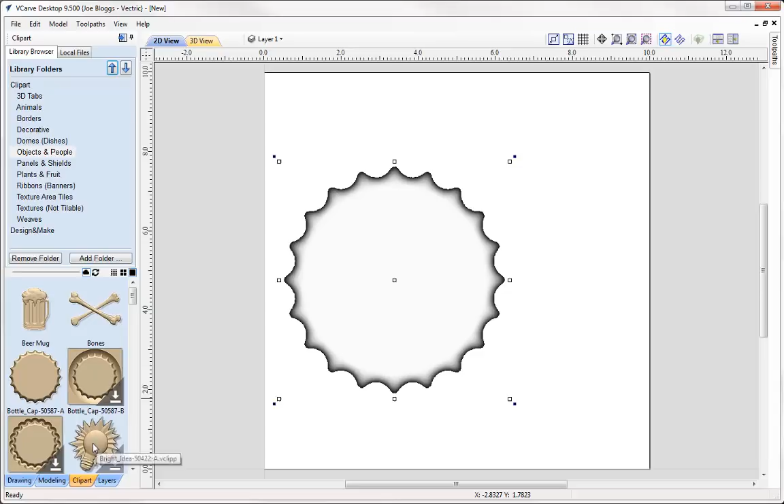So with that, the item has now been downloaded and I can simply move that into the part space. Or alternatively now, if I've already connected, I can just simply paste that across and it will download and get pasted into the job at the same time.

If I close the software now and restart it, my connection is still there. So if I go now to start another part and introduce more clip art, for instance, I'm now going to add in these flowers. It won't prompt me, it will also automatically download and import because I'm already connected to my V&Co account.

The biggest changes to version 9.5 certainly fall within Rotary, in terms of the way we manage the job setup, the display of the different models and toolpaths, and the toolpaths themselves. In version 9, Rotary was only available as a gadget-only function through the top menus. As a consequence, it was very difficult to make job modifications, and we couldn't combine different layouts such as spiral with cylindrical within one job.

In version 9.5, we no longer need gadgets in order to create the job setup. We have a new job type called Rotary with a dedicated workflow, and as a result we've made it very easy to edit parameters such as changing the job size or the orientation, and we can combine spiral and cylindrical layouts within the same job, and we'll see demonstrations of that later.

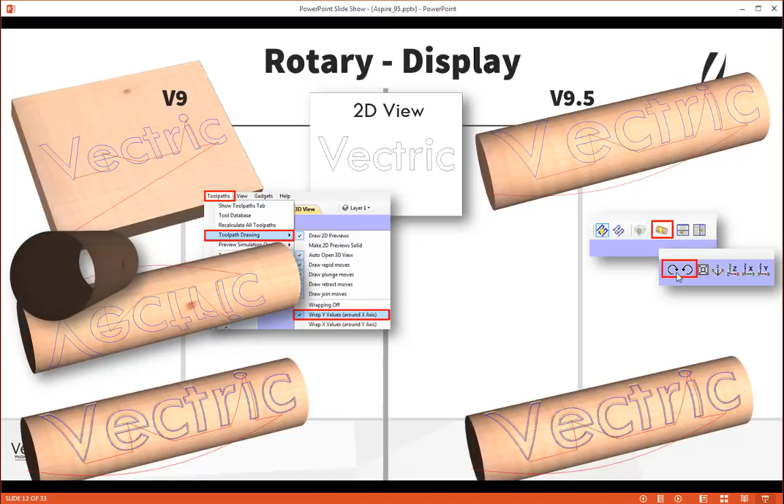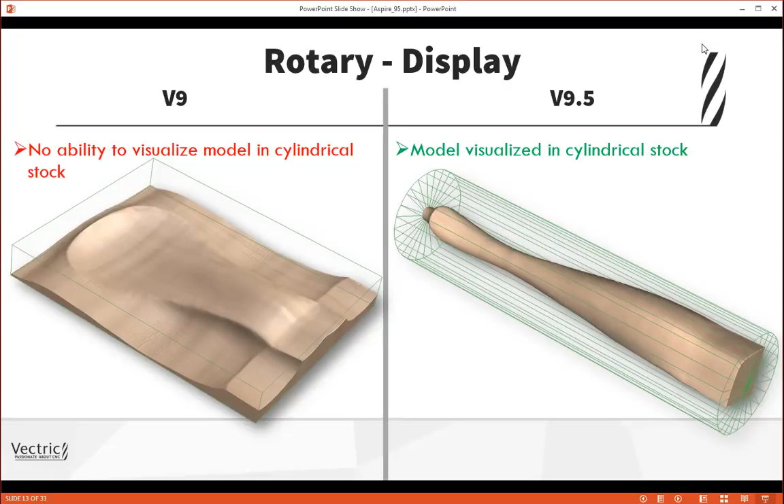Okay, so I started a session in 9.5 and we'll perform the same demonstration. Rather than gadgets, I can go straight to create new file. I've selected rotary as my job type, length 20, diameter 3, and I'm orientating the rotation axis along the Y, therefore I'll be wrapping the X values. Okay, and I'm now going to OK that.

So I've suddenly realized, just like I did with the previous one, I need to change this to a 5 inch diameter. Well, that's very easy here. I simply change to 5 and OK. But finally I forgot that actually on my machine I need to reorientate this completely, because I want to have my rotation axis parallel to the X and wrapping the Y. Well, that's easy too. I can simply select that option and that will rotate the part round.

So with that, I'm now ready to create the text. I can place the text on the screen now and just type in Vectric, and I will locate that in the center. Go across to machining now, select the profile toolpath and calculate, and immediately you can see on the screen that the toolpath is facing me from the middle of the part.

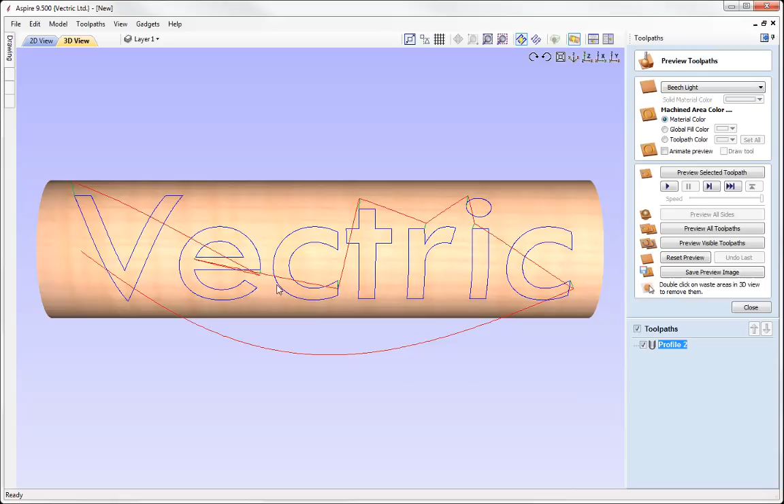If I rotate it, it's solid now rather than being open-ended, and of course I can now move forward and simulate the toolpath. So we can see there are some significant improvements to the speed with which we can create the actual job type, the way in which we can modify that if we do need to go back, and of course the way that the model is displayed.

Okay, so there's been considerable improvements in a number of key areas with rotary.

In the next demonstration we're going to do something that was previously not possible with version 9. When setting up a rotary job using the gadget tool, you had the option to either have a simple cylindrical wrap or a spiral wrap with a number of revolutions. However, in version 9.5 every job is considered essentially a cylindrical wrap, with the option to have dedicated levels that are set to wrapping to allow the clip art to be wrapped round the cylinder. So in this example we're going to combine the two by having essentially a spiral wrap portion in the lower region of the lamp stand with a standard cylindrical wrap with the fluting toolpath in the upper region.

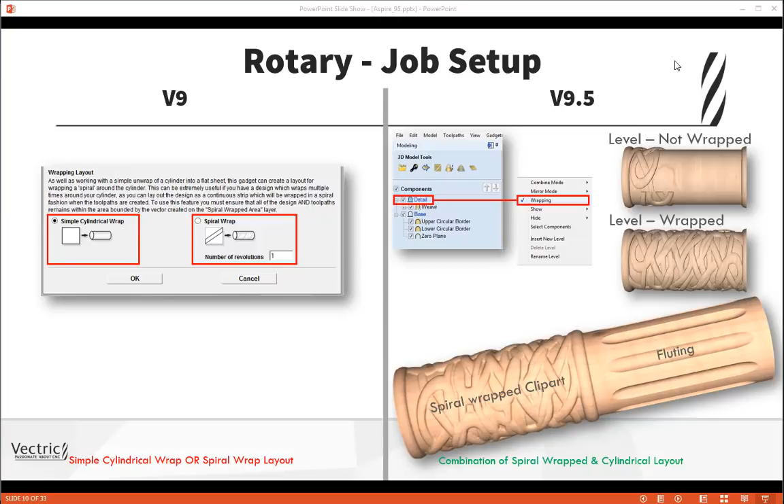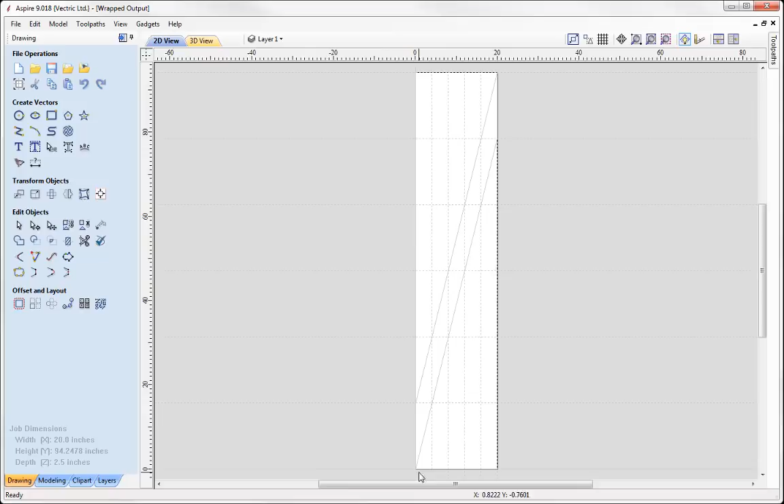Before we take a look at Aspire 9.5, I wanted to show the spiral layout using the gadget in version 9. So from the gadget menu, gadget, wrapping, wrap job setup again, and in the lower right hand corner here I'm going to set it to a spiral wrap with 5 revolutions. What that does is create an oversized part, so it's extended in Y here with the vector to help locate the clip art in order to be able to wrap it round 5 times. But as you can see, it's created an oversized model which will restrict us from combining this with a standard cylindrical wrap in one half of the model.

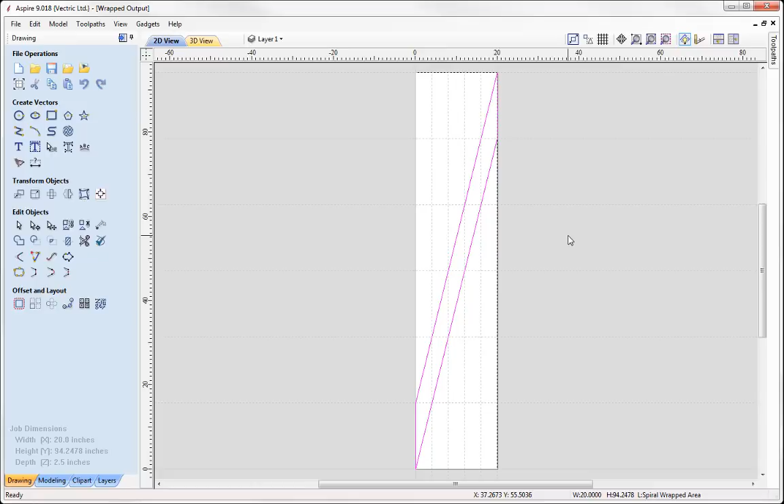So I'm going to close this down now and we're going to open Aspire 9.5.

Okay, so we started a session of 9.5. I'm going to go straight across and create a new file here, 20 in length, 5 diameter. And I'm going to bring in some clip art, which is going to be the clip art for the weave.

So I'm going to drag that into the space, and immediately it's asked me would I like to modify the model to move the 0 plane up to maximize the stock that we've got. I'm going to say yes now.

I can go straight to the 3D view. You can see the model with the relief, and if I did want to see the stock in situ as well, you can see that together, and it's modified the 0 plane to accommodate the extra clip art that we've added to make full use of the stock.

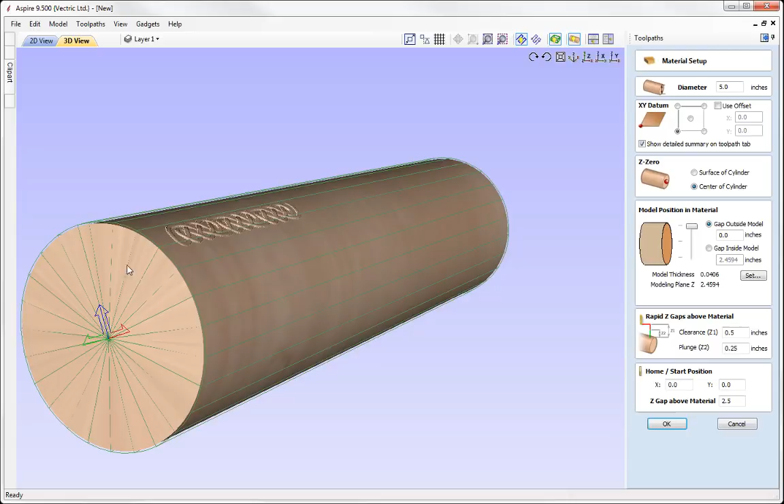Adding that 0 plane would be something that would need to be done manually, and obviously its base height would need to be modified manually as well. So this is automatically done in 9.5.

So I'm just going to come back now to the 2D view and swap across to our 2D menus, and before I start to manipulate that clip art, I need to really create a dividing line down the middle which will differentiate between the spiral wrap and the standard cylindrical layout.

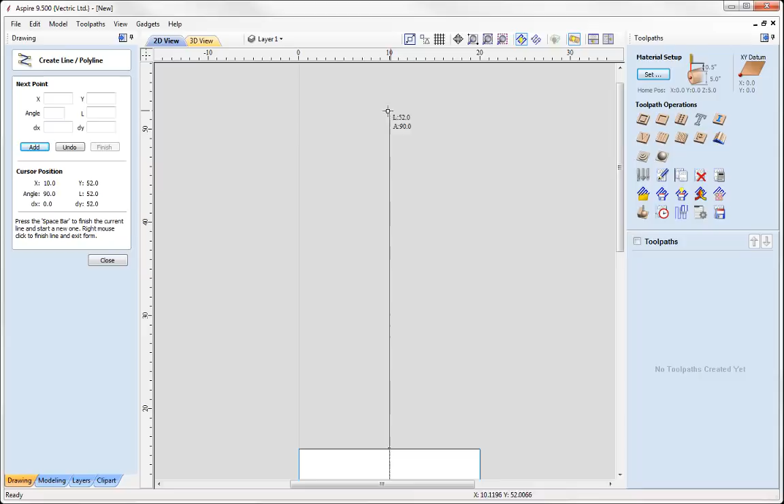So I'm going to go into my drawing menu and add in a vector from the center, going straight up at 90 degrees. I'm now going to take my clip art here and manipulate it. I'm going to change the size, increase that a bit to make it more chunky, and rotate it round by 90 degrees using 9 on the keyboard.

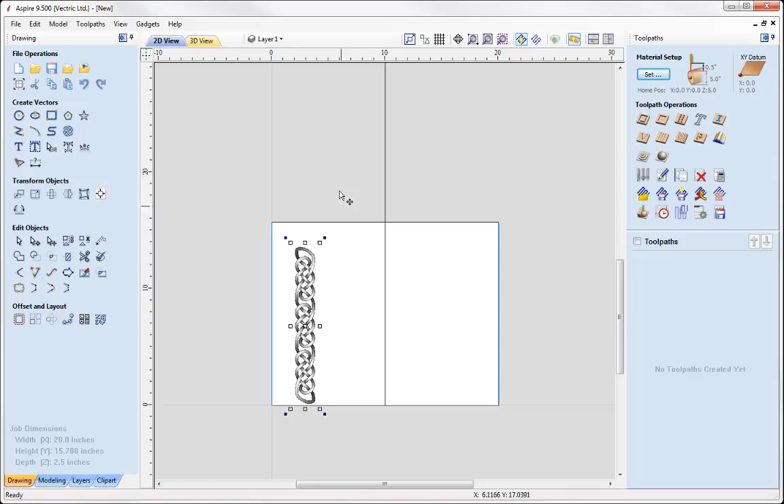Just slightly reposition that now, and I'm going to make a copy of it. I'm going to hold the control key down and move it up. I'm not so worried about the alignment because I can address that after the fact. I'm just going to move this up now, and I'm happy with that. I've got enough length there to wrap all the way around.

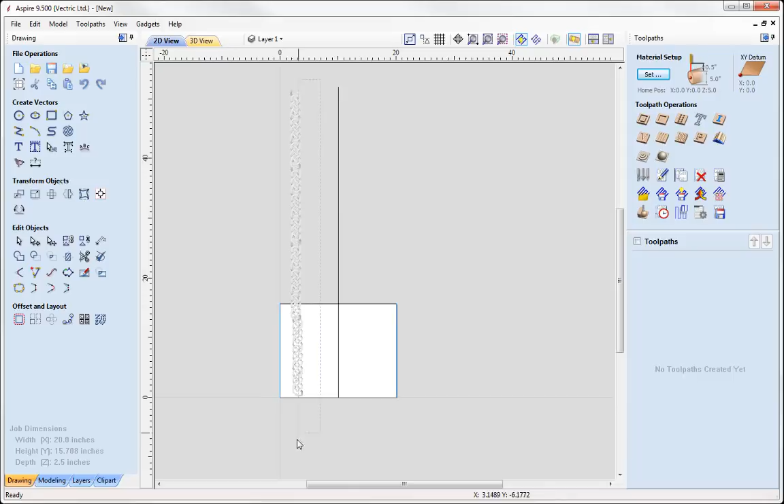I'm going to select those items and align them to the left edge, then come in and group those items together as one single object. That allows me to move that around as a single entity, and of course rotate that as a single entity. So currently if I go to my 3D view here, you can see it's just wrapping around once.

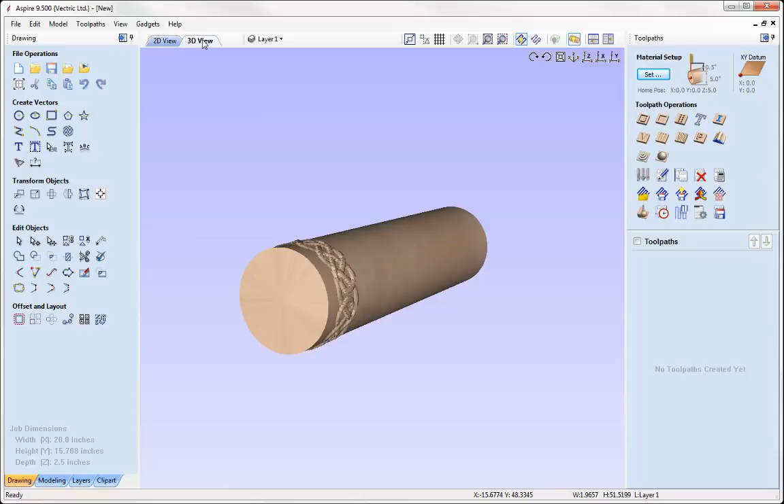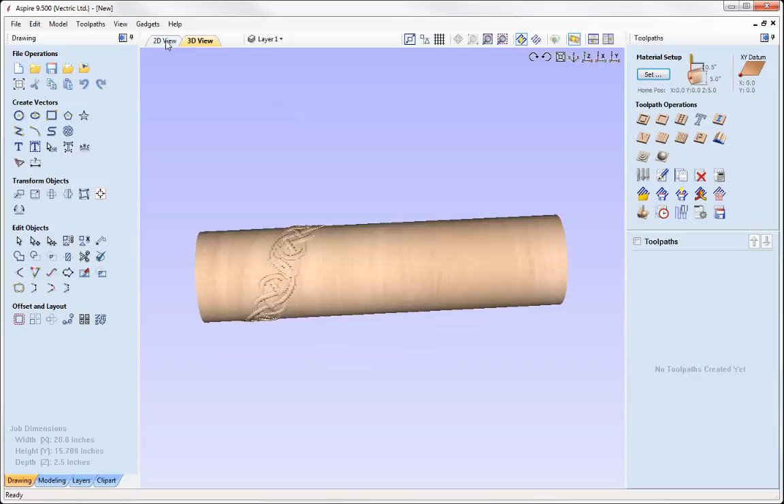If I rotate this, bringing that across, you can see once again it's not fully wrapping all the way down, it's only doing one wrap, or what can actually be seen physically over the job space.

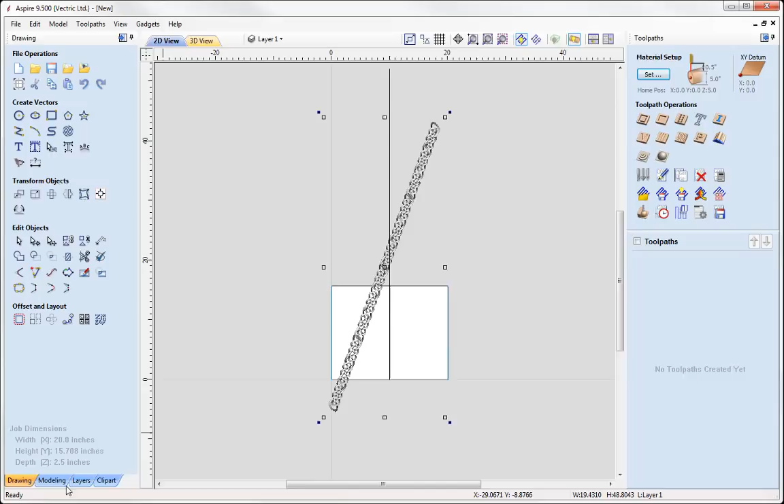So what I need to do now is manipulate this to only essentially overlap the edge, just overlap the dividing line, and then change the level to be a wrapped level. Before I do that, I'm going to do some housework here and create a new level and move the weave to that level.

Come back now to my clip art and rotate that round and move this into position. So we're going to move that roughly like so. Okay, now I'm happy with that at the moment.

If we then have a look at the 3D view, once again the angle's correct, but it's not really wrapped. So I can come back to my level now and simply select right mouse key, wrapping. So that's immediately wrapped that round.

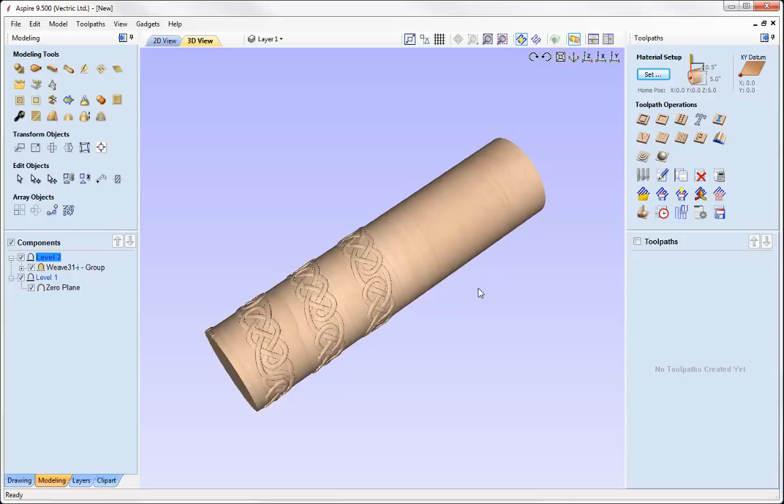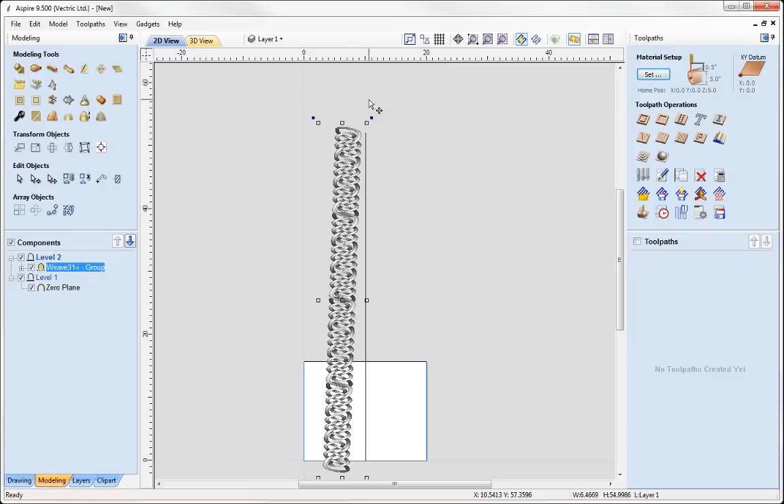What I'd like to do really is make this a little bit more of a random intertwined tile all the way round. So I'm going to come back to here and rotate this back round, back vertically, and change its size a little, increase it, then rotate that back round, maybe increase the size a little more, rotate that round, and move that back like so.

And just increase that now, and we should, when we come back to the 3D view, see that we've got this quite unusual wrap of the relief over the cylinder. Essentially it looks like we've tiled something round the cylinder, but in essence this is just a spiral of the clip art that happens to overlap, and because we've got that set to merge, we get this nice random looking wrap all the way around the cylinder.

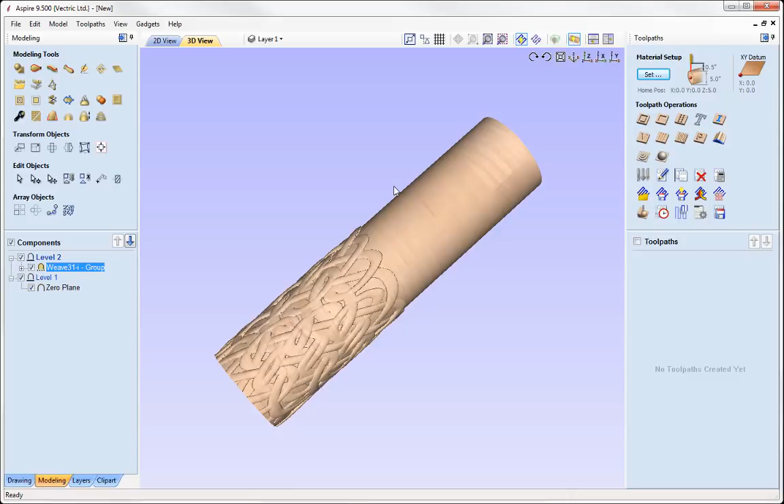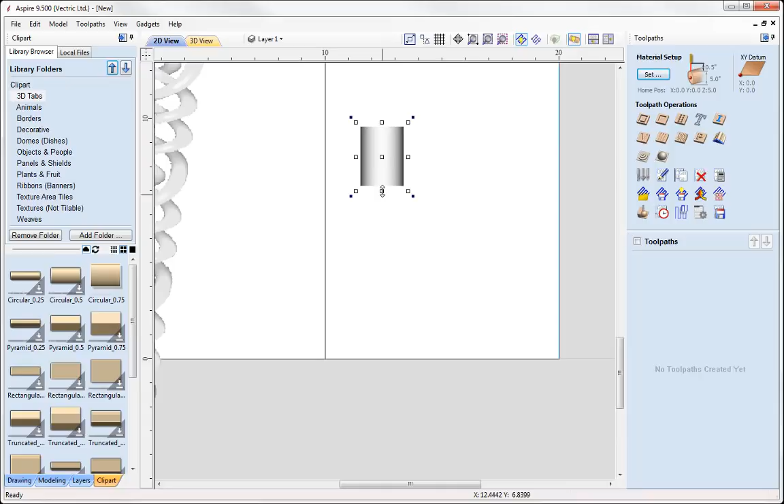Now I need to put in a divider between the top half and the bottom half. So I'm going to come back to my clip art, and in my 2D view simply pick up the 3D tabs here, drag one across. We can see that's particularly small, so I'm just going to rotate that and scale that up, extending it in length either side.

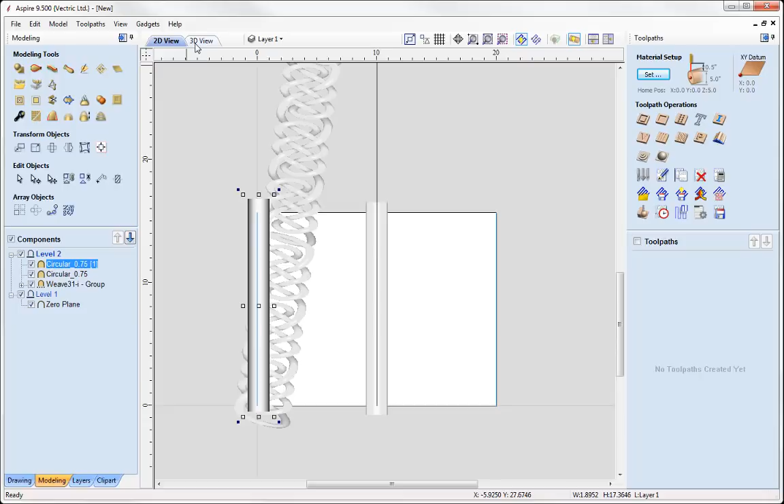I'm going to change the height of that, so we're going to have that be 0.3, and we are going to now center that on the screen, and make a copy of that at the bottom. I'm going to pick that up and hold control and move that to the bottom. Okay, somewhere around about there. If we have a look at the 3D view, we can see that we've added a base and the divider across the middle, so that looks nice.

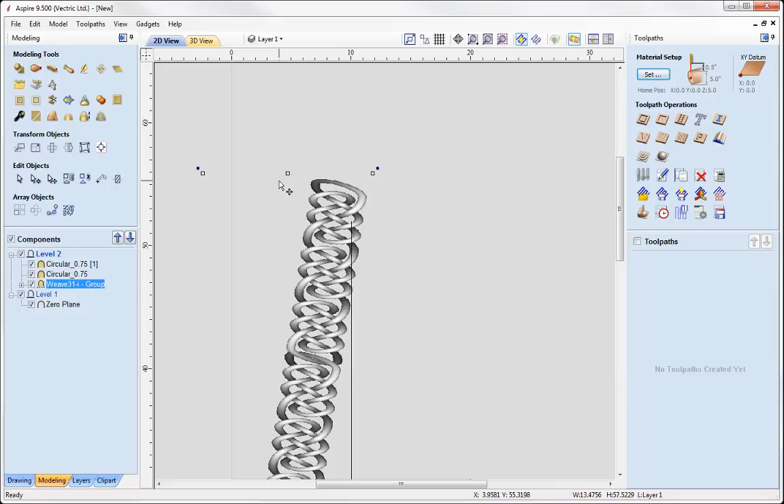We've maybe got a slight overextension here, so I just need to modify my clip art a little, wind this back a tad. I'm just going to bring that back now, and maybe move that slightly that way, and we should, if we have a look at 3D view, have the wrap all the way around.

Okay, so that's quite nice, and like I say, it's a nice organic intertwined weave, which has essentially come from a simple bit of clip art being wrapped round there and overlapping and merging into itself.

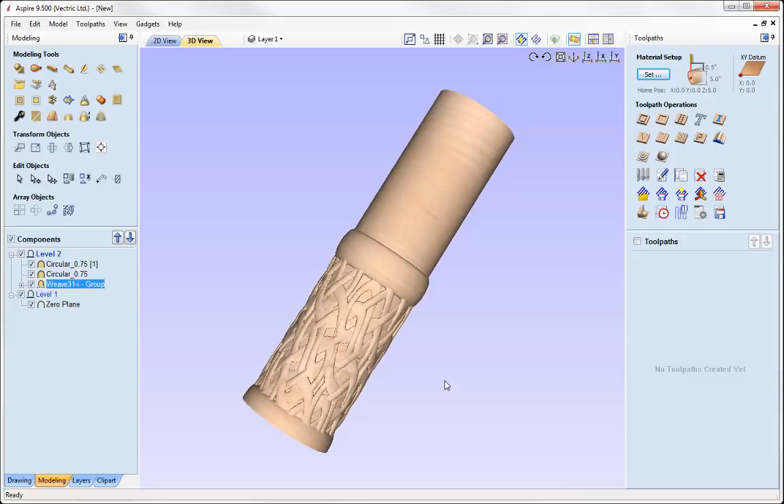So back to the 2D view now, and I want to add in a fluting toolpath to this region here. I can access that from the gadget menu, so I'm going to come up to gadgets and go down to wrapping and fluting layout.

In this case we want 6 flutes, so I'm going to enter 6 there. Now the offset from the start, meaning the distance from the end of the part through to where we want the start of the flute, is going to be roughly around 11.5, and we'll take that up to within 1 inch of the end and OK that.

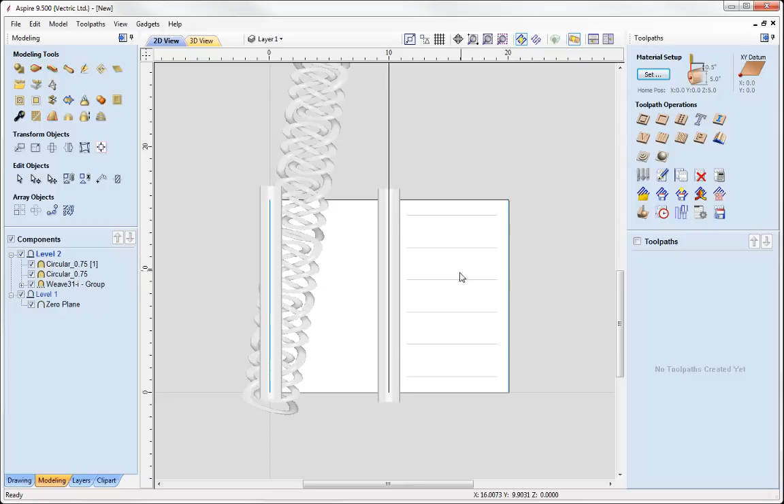So we've got the vectors that have been created here. I now need to decide the start depth for these, and then the cut depth thereafter. I'm now going to come in and pick those vectors, just the fluting ones, go through to the machining, and set up my fluting toolpath.

In this case we know this is a 5-inch diameter, and we are going to go down there, and the maximum depth here is 0.3, so our clip art here is 0.3. So we're going to go down, OK that, and do a start depth of 0.3 and go down by a further 0.2, using a larger tool than our 1/4-inch ball.

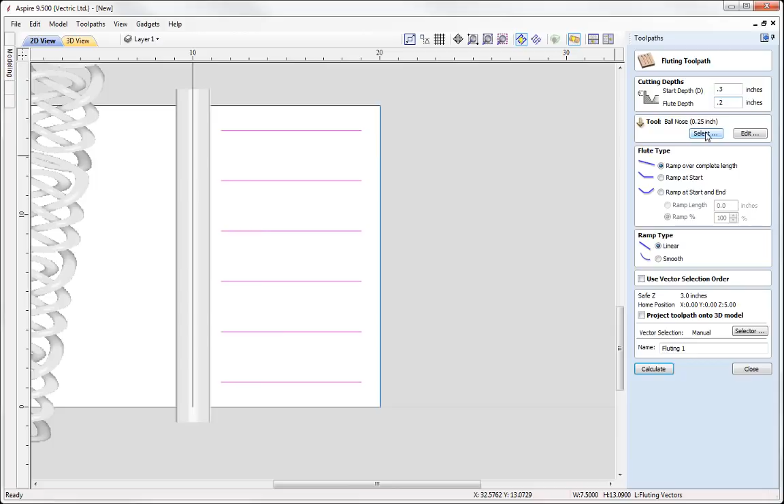I'm going to select that and basically copy that tool and change it to a 1-inch diameter, and change the cut depth maybe just to 0.25 and OK that, and we are going to do a ramp at the start and the end, 25%.

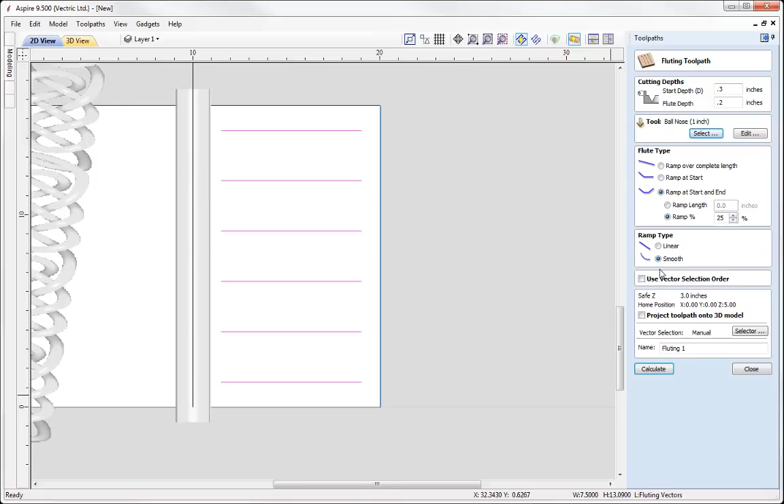So essentially it's going to smoothly ramp in down from the top to create a groove, then go at a constant depth of 50%, and then lead back out or ramp back out. We'll calculate that toolpath - we can see that there. I'm not going to simulate that yet.

What we need to do is create the toolpath for the lower half too. So back to...

Look at the rest here, and we need to really just pick a ball nose here to pick out most of the detail. So I'm going to come back into the 3D finishing, and use a simple 1/4-inch ball. This is not particularly efficient because it will be removing the material on the right hand side here, 90 degrees, and calculate.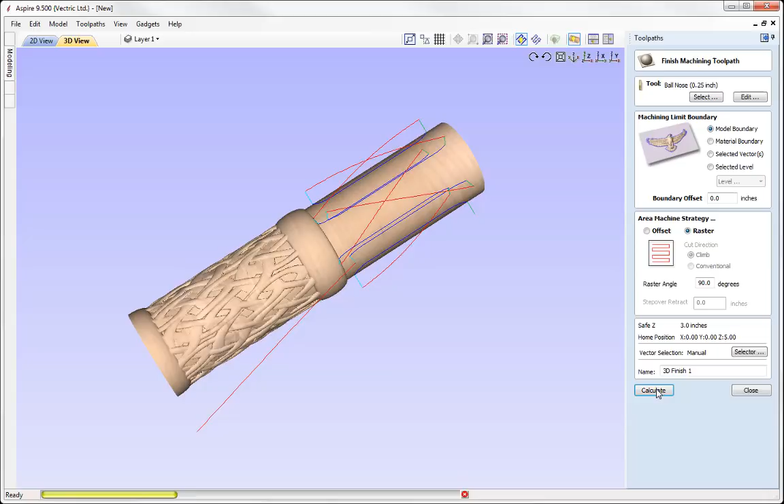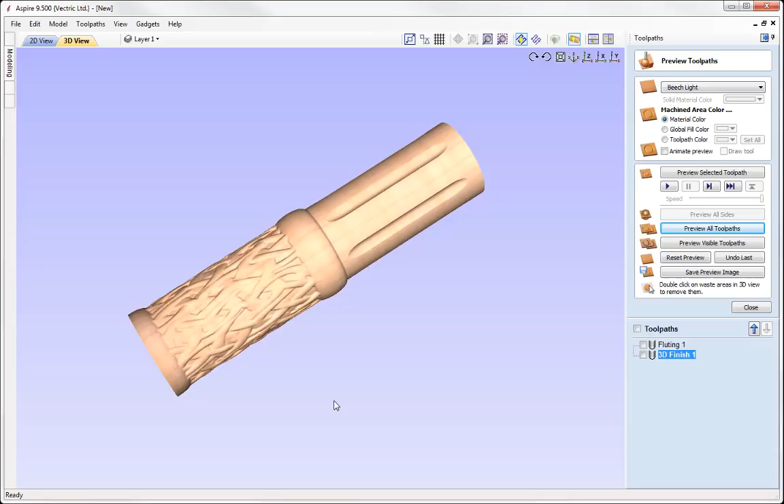Okay, and now I'm going to simulate all those toolpaths, and there we've got our simple lamp stand where we used a combination of a spiral wrap at the lower half and then a standard cylindrical layout with a fluted toolpath at the top part. You can see that it's created quite a neat shape, through the ability to combine levels that have wrapping set with those that don't. And once again, this is something that was previously not possible with version 9.

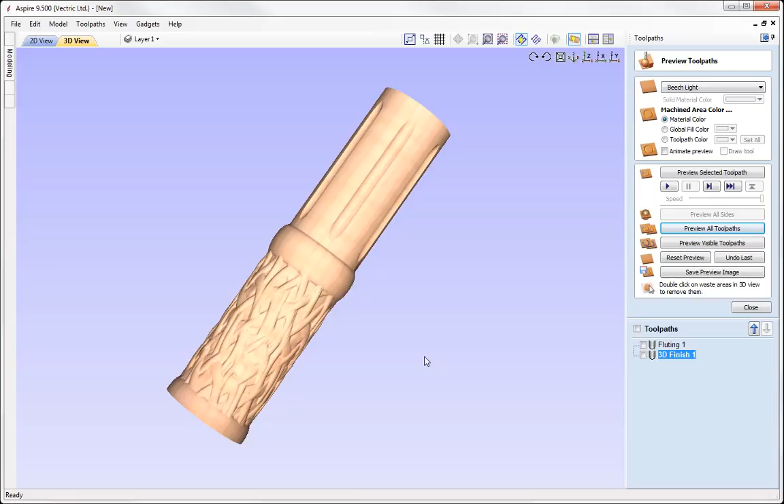For those Aspire users already using Rotary, they're probably fully aware of the vector unwrapping tool that's only available as a gadget in V9. A limitation was that the vector had to be in the center of the job before applying the unwrap. In version 9.5, this is no longer a gadget-based function, but written in as a new icon in the Transform Objects menu. It's far easier and simpler to initiate the unwrap, and we have multiple center of rotation options available.

So we started a session of Aspire 9.5. I'm going to go straight ahead and create my Rotary job, OK that, and we're ready to import our TableLeg.eps. One thing I don't have to do with this version is it automatically creates drive rails for me based on the fact that I may well be wanting to create a 2-rail sweep surface. So that's all done for me, and I can go straight ahead now and come up to the modeling menu and select the drive rails and the cross section and apply that.

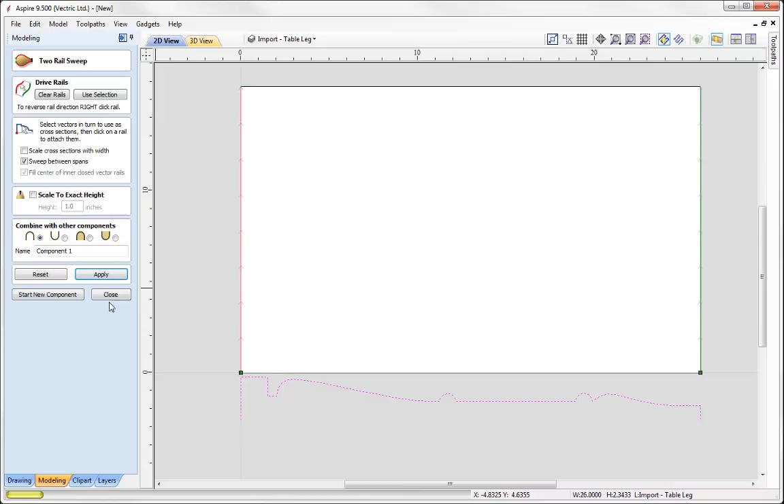And we can look in the 3D view, and immediately that's shown with the correct color, it's shown correctly wrapped, and it's a solid model. So some big improvements there just on visual display.

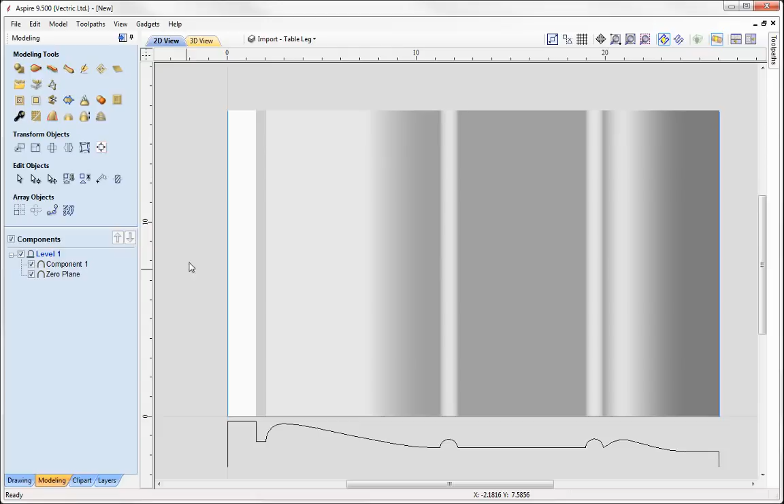So one thing I'm going to do next is to create the vector for unwrapping. Now we already know the dimensions, so I'm simply going to go ahead now and go into the drawing menu and select the polygon and basically just make sure that that is 1.1.

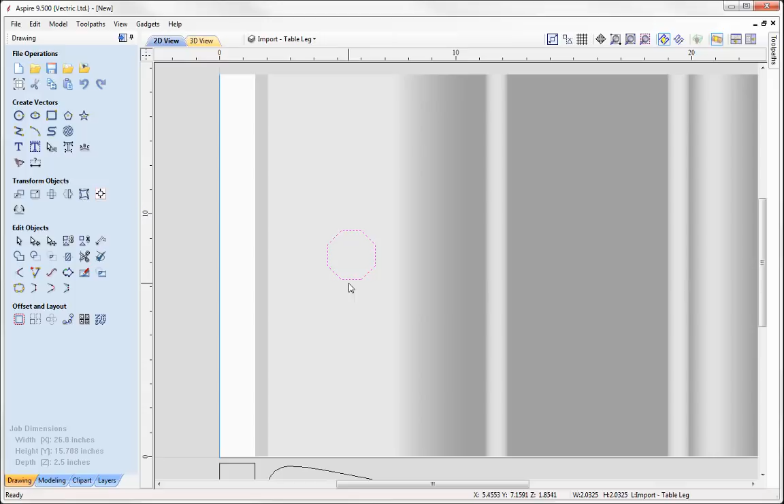And I'll go ahead now and select the vector and unwrap it. I don't need to use the gadget, and I don't need to have the vector located in the center. You can see from the Transform Objects menu we've got this new icon that unwraps.

It checks to see if it falls within the extremities of the 5-inch stock we've got. That's no problem at all there. You've got different options here using the center of the contour, center of the workspace which is the original option, and a custom point if you want to move that off center. So I'm going to go for the use center contour and apply.

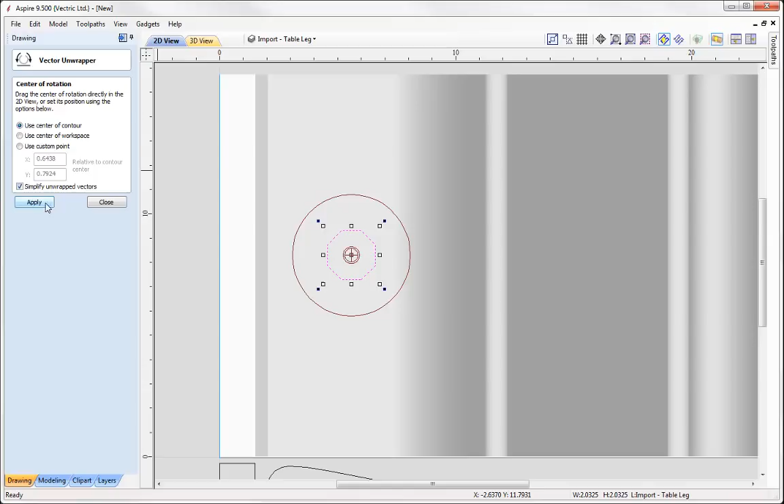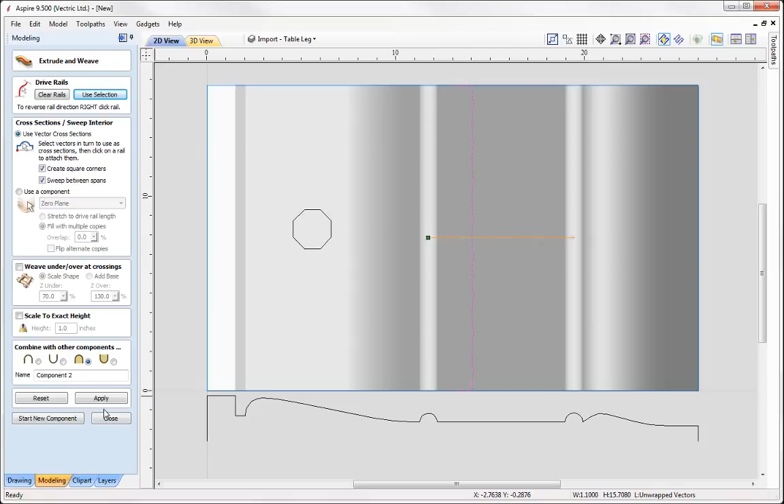Okay, so that's unwrapped it for me. I'm going to go ahead now and create the drive rail for the extrusion surface, and simply select that vector, come into the modeling, extrusion, pick the cross section, merge that in and apply, and we'll have a look at the 3D view.

So as you can see, we very quickly added that in. The tools, the visual tools to be able to see the wrapped component as a solid model, and the fact that with the vector unwrapper I didn't have to center it, and I had multiple options, meant it was far easier for me to work with, and we've arrived at the final design far quicker.

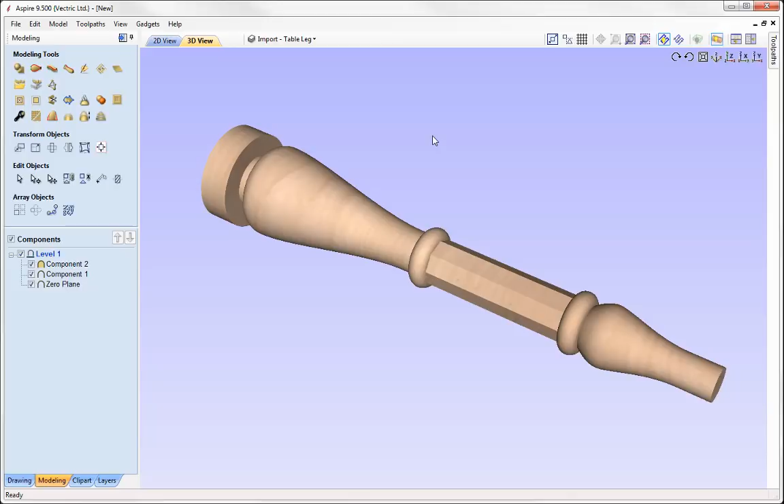For version 9.5 there are significant improvements to the way text is created and edited. If we look back to version 9, you would only ever see the text placed on the screen after completing the entries in the form. There was no dynamic modification, so if you're changing the height or justification, you would need to apply that in order to see the effect on screen. Also, any transformations to the text would be reset when editing the text content.

For instance, if you'd rotated the text, scaled it, mirrored it, etc., and then wanted to make a change, those changes were all lost and the text was presented in its original location.

Whereas for 9.5, when you start by clicking on the screen, it will show a text box showing its start position, its height, and its alignment, and the text begins to be displayed as soon as you enter the first character. So we can see we also have dynamic modification.

If you're changing the font or the height, that will immediately be updated on screen without having to apply. And most importantly, any transformations to the text are maintained when editing the text content, and that applies whether rotating the text, whether you've wrapped it along a curve, modified its kerning, or applied some non-proportional scaling or mirroring. That's all maintained if you go ahead and edit the text at a later point.

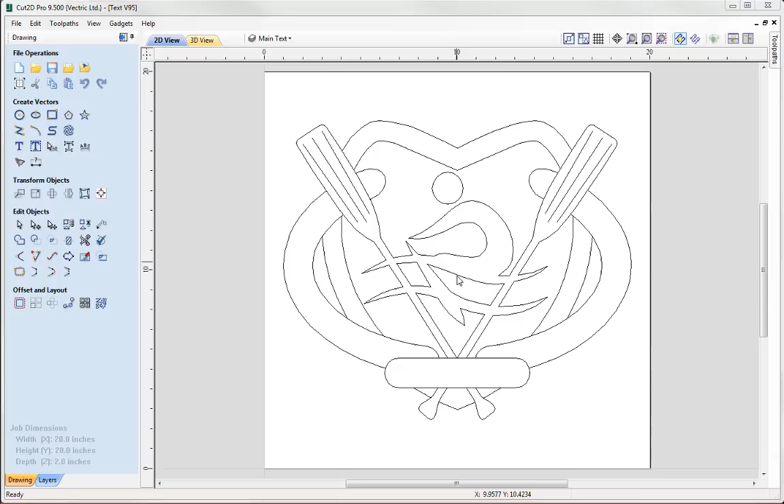Okay, so we've got the same part in version 9.5, and like we did with version 9, we'll take a look at some of the simple fundamental issues we have and see whether these have been remedied. Now I'm going to go to the draw text function.

You can immediately see it's given me a location for where that text is going to start, and wherever I click you can see I've got a text box representing the text alignment, whether that's left, center or right. You can see that's being changed dynamically on the screen.

And you've got the height, so if I change that to say 2, you can see that immediately being updated on the screen, and back down to say 1, and you can see that location being placed. So immediately after that I don't have to come up to the text entry box. I can simply start typing canoe, and we'll see the letters on the screen.

Great. So now, as we did before, mid-flow, which is nice here, I'm going to click on that and scale it down. Okay, I'm happy with that. And then add in 'ing' to create canoeing, and as you can see, that kept the transformation.

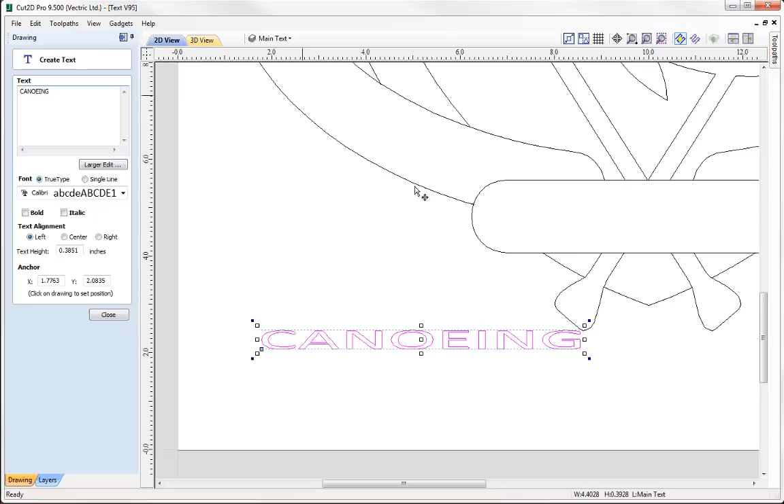Now similarly, if I want to rotate that, what we had to do in version 9 was come out of the text entry, because the transformation box didn't have rotation anchors, but they are here now, so I can just rotate it and come back in and type kayak, and as you can see, it's kept the rotation and the scaling.

And similarly with the kerning, that would also be maintained. So you can see it's a big leap forward with the creation and editing of text, because typically we don't always get things right first time, or quite often we like to use templates for text where we come in and just update the font or update the text entry, particularly if you're making plaques, for instance, where you might have template text that's just edited to be different dates or different names.

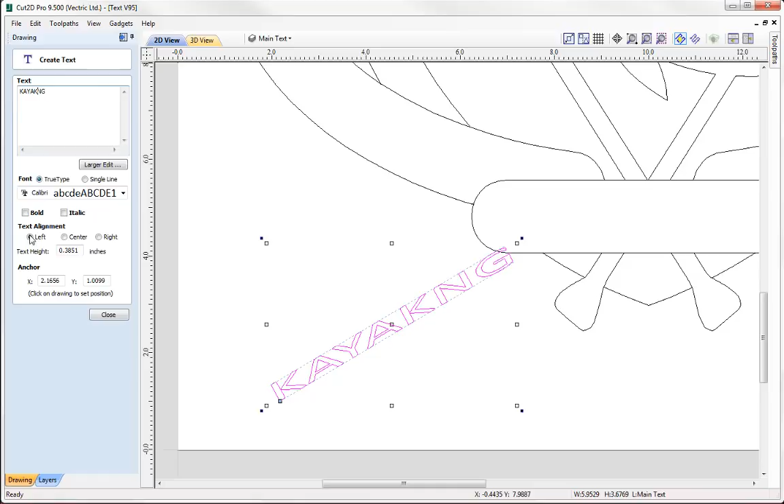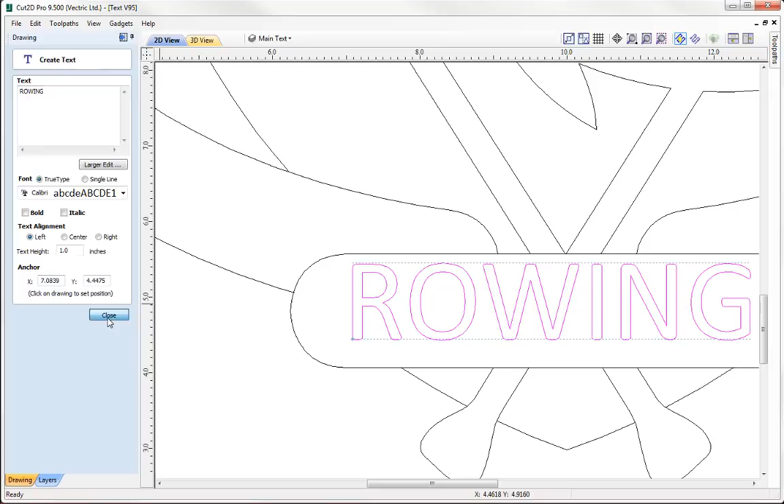So I'm going to delete that text out now and look at the sign itself, creating the first word, which is rowing. I'll place that there. You can immediately see that's the wrong height, so I'm going to change that to 1 and add rowing into this location. I'll shift and pick that outer curve, and align it to the center of that vector. That was simple.

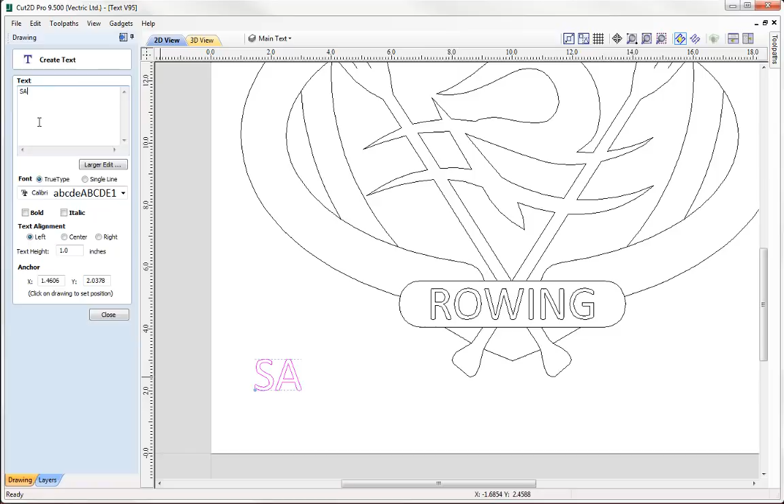Now we're going to add in the word Salisbury into this region here, as we did with version 9. So straight into the text, I'll create it down here and type in SALLSBURY and close out that form.

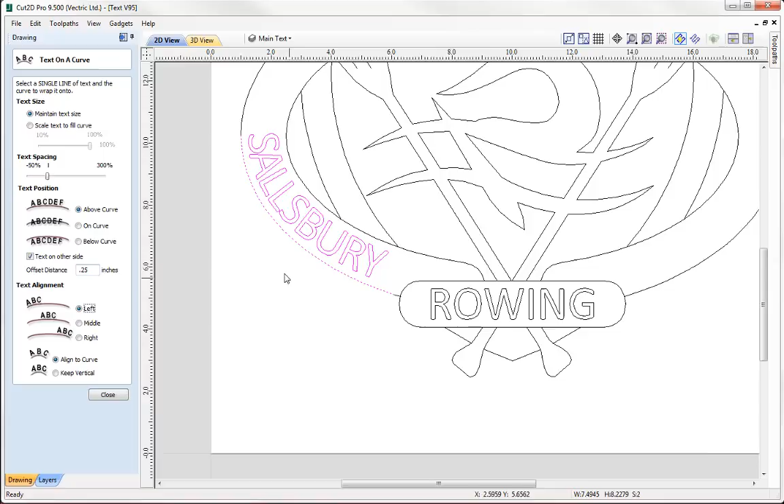I'm going to shift now and pick that outer vector, do the text on a curve, and align to the curve. We're going to be on the other side, and we need to apply an offset of 0.25. Now we can see the letters, but the spacing's not quite right, so I need to increase that up until it's right.

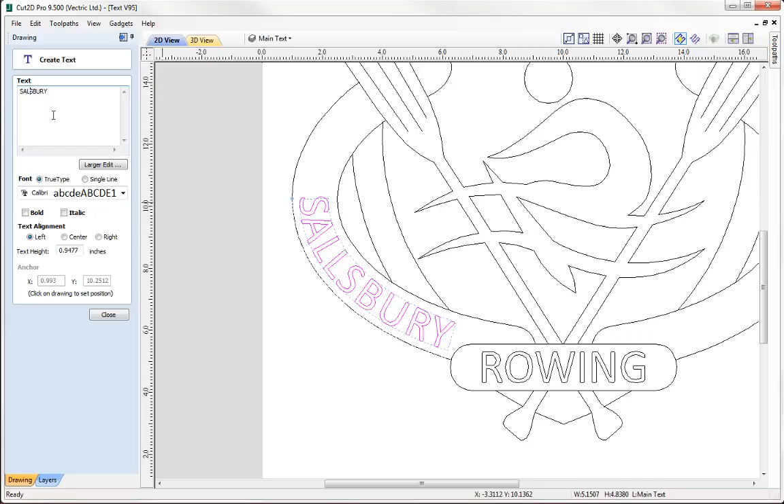Okay, I'm happy with that, close that out. Just like I did with version 9, I suddenly realized I've spelt it incorrectly. So I'm going to come back in to the text form and just change that L to an I, and it's kept the spacing and just replaced the L with an I. That is perfect - that saved me a hell of a lot of time. I'll close out that form.

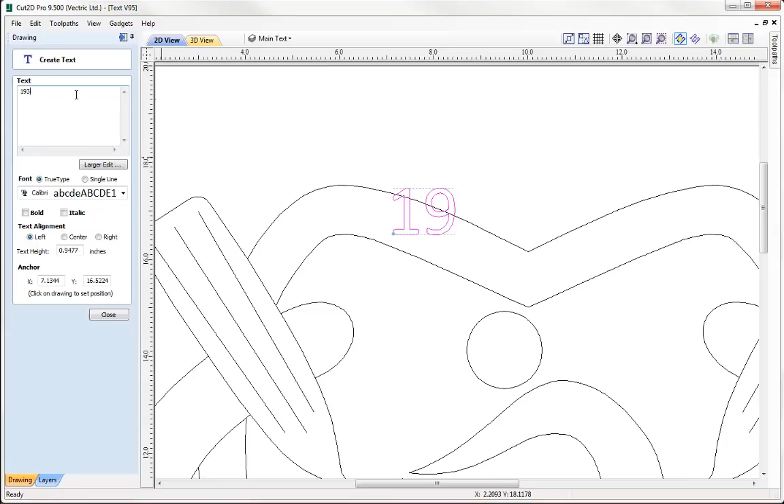We'll switch on the other text the other side for association, and now I'm going to create my two dates here. Simply come in with the text, place it somewhere around about here, and this is going to be 1934. Immediately I can see it's the wrong height, so I'm just going to change that to 0.8.

Mid-flow I can actually click on it, rotate it, and get it into position. Just apply a bit more rotation. I'm happy with that now, so I'm going to copy and paste it - Control C, Control V - and just use the 9 on the keyboard to rotate. I'm going to move that across to here.

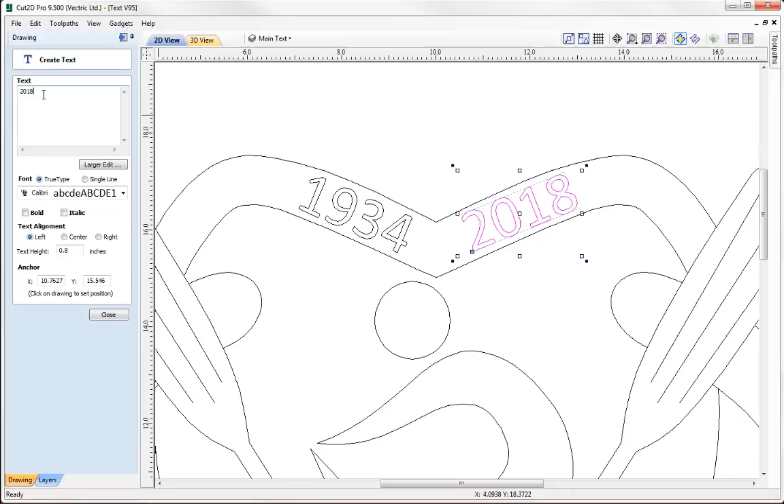Okay, and just come back to the draw text function and change that to 2018. As you can see, we've completed the sign in a much shorter time than we could have done with version 9, given the mistakes that we made along the way.

Further to the improvements with Rotary, we've seen some big changes in how we import models, particularly Rotary based models. With version 9 there was no specific workflow for Rotary, and it was often very difficult to rotate and orientate the model to fit the axis of the block, and most importantly difficult to scale the model to fit within the block, given that you have to calculate the unwrapped widths and fit that to the block. Now with version 9.5 that's been completely rewritten with a new model import, only displaying the relevant parameters depending on whether you're importing a rotary based full 3D model or a flat model.

We have automatic initial orientation of the model, which helps get the part into the correct position before the unwrap. We have a blue bounding cylinder shown around the model, which helps us visualize its orientation. Automatic scaling to fit the block is very important - the calculations are done to ensure the model size is scaled to fit your stock, and we have the ability to move the rotation axis to ensure we get a correct wrap when we action this, and the wrap result is displayed on screen.

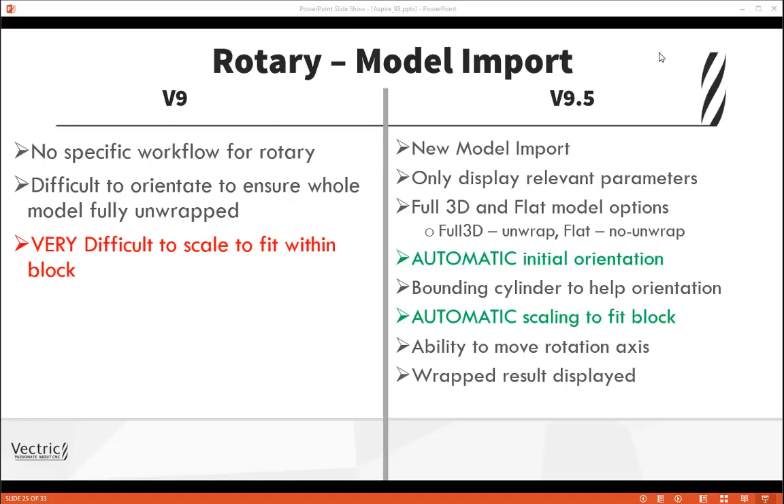So the best way for us to show this is to look at the two different products. I'm going to start by opening version 9.5. Okay, so I started a new session of Aspire 9.5. I'm going to go ahead and create a new Rotary job and import the STL file - straight ahead now, and import the table-leg.stl.

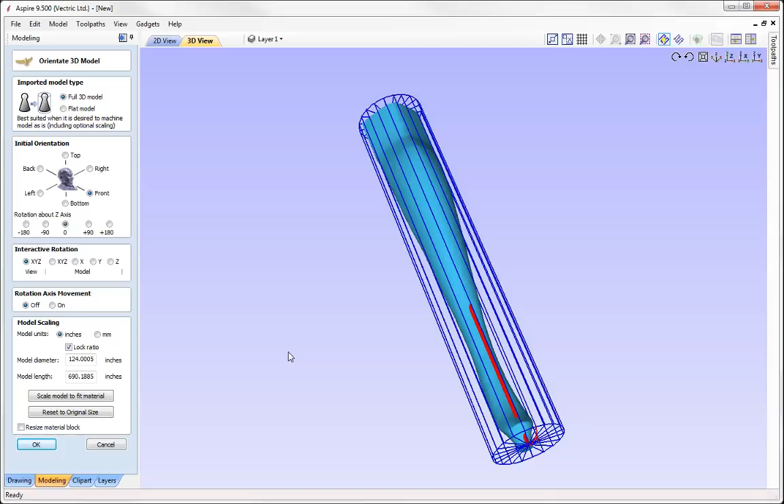We're immediately presented with a different format, differentiating between the full 3D model and flat model options, with dedicated parameters and workflow for each. It's automatically attempted to align my model to the block, giving me a bounding box around the model and the rotation axis. We can clearly see the rotation axis is not running through the model, which I would need to change to ensure a true wrap. So I'm just going to orientate the model now so I can move that down.

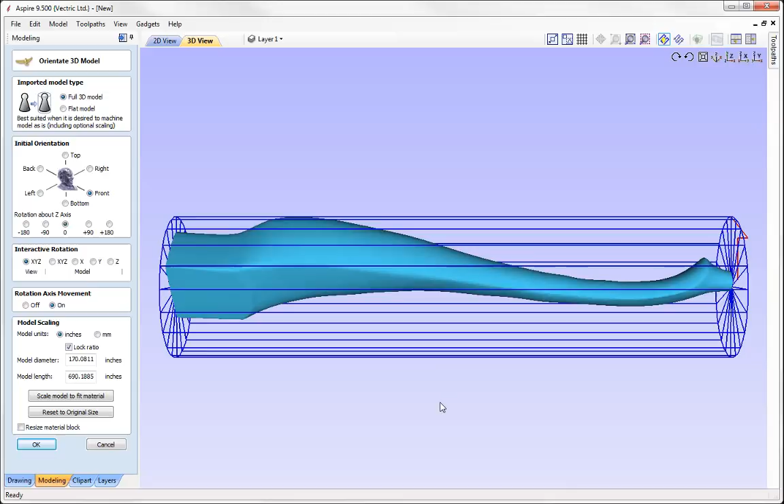Now you can see that I'm just going to move that down gently now so it's inside the actual model, and it will immediately resize the bounding box.

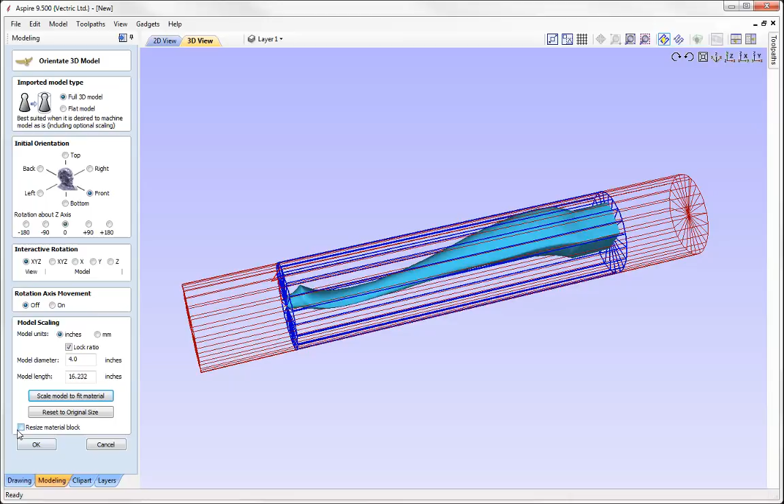One thing I must do is actually scale the model to fit the stock, so I'm just going to scale that now, and you'll immediately see presented on the screen the stock and my model within the bounding box. I want to remove some of this end stock, so I'm going to resize the material block as well and hit OK, and that will unwrap the model but show the presented wrapped model on the screen.

So I can manipulate that, have a look, I can see that in its unwrapped format as well, and I'm happy with the result and ready to move forward.

You can see given the stock size, the table leg is at 2 inches, so it's filling the maximum height, filling the complete 4-inch diameter cylinder that we have.

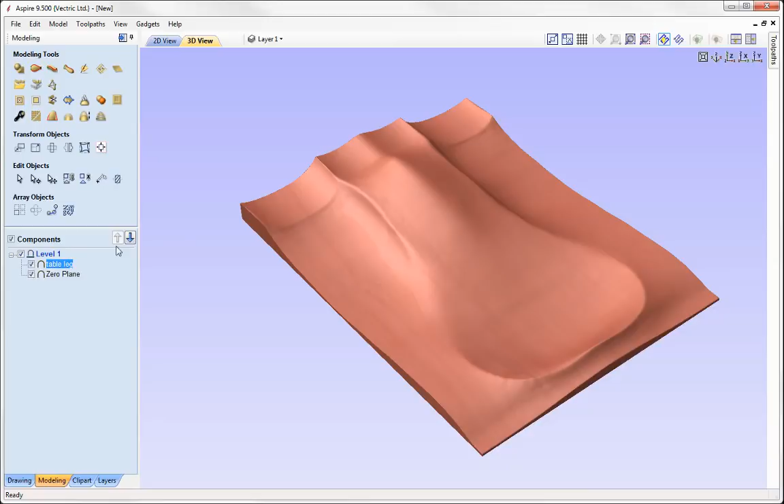So the next stage is to add some clip art or relief on the top. I'm going to add in a new level first, go to clip art and add in some clip art. But remembering this is Aspire, we can add in extra STL files like we did with version 9. So I'm going to position and orientate the model and go and grab my grapes.

In this case it's a flat model, very easy, don't have to do anything here, just go OK. So immediately that's presented on the screen. Very simple to bring in a model, because we differentiate between a flat model and a wrapped 3D model.

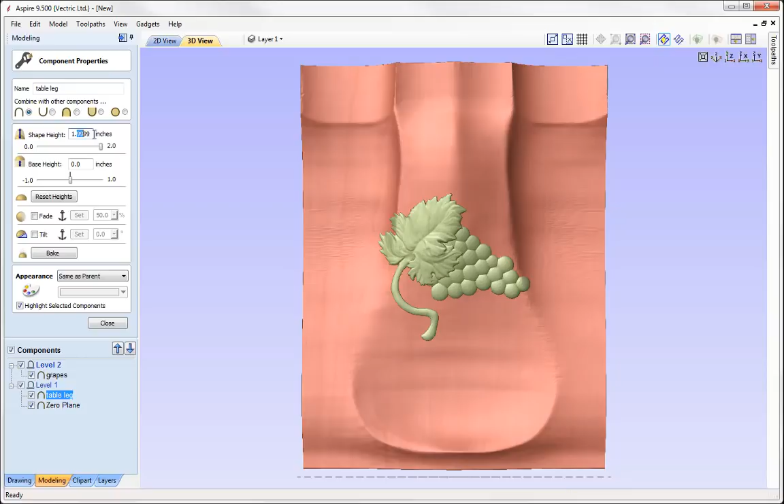Now I do need to quickly change the height of those grapes to say 0.2, and I'm now going to also manipulate the height. I'm just going to change slightly the height of my table leg, because I know that may burst through, so I'm going to change that down to 1.9. Then we're going to come back and manipulate the grapes.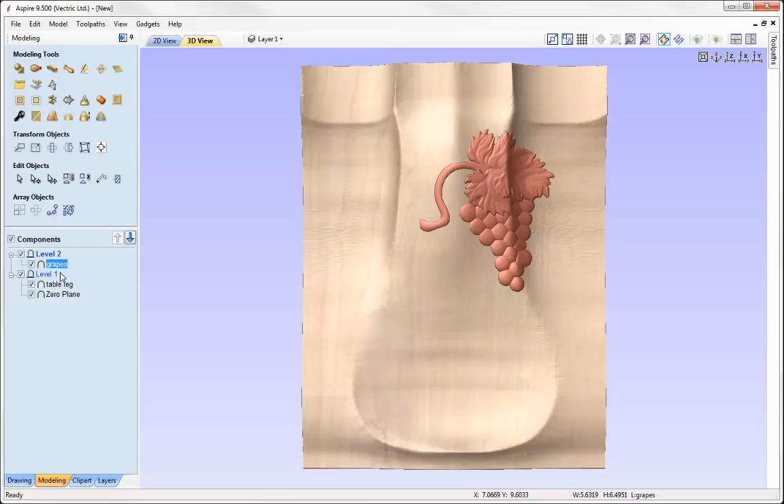I'm going to pick that up now and rotate it round, and I'm happy with that level of rotation. Move it across, and we'll put it somewhere around there, and I'm going to close out that form, and rather than mirror it manually, I'm going to use the mirror mode with that level, mirror right to left.

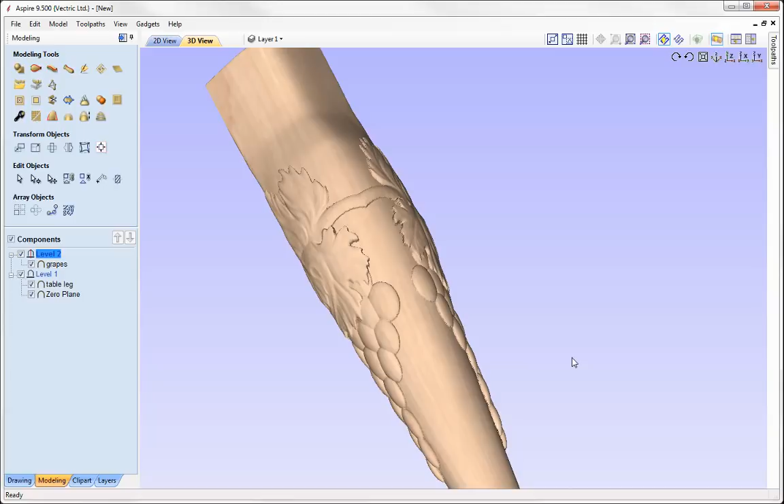That gives us a nice result, and I can immediately come back up and see the wrapped result. As you can see, it's much easier to work in the wrapped view now that we've had significant speed ups there. So we can see that, yeah, I'm happy with that, and I'm willing to move forward to machining.

I'm going to go straight across now, set up my block, everything's fine there. There's still a bit of material clearance at the top, and go straight to the 3D finishing, 0.25 inch ball and rastering at 90 degrees.

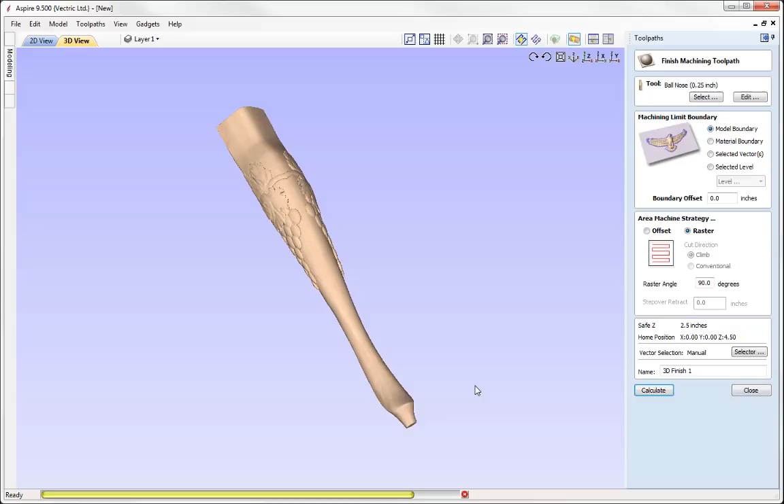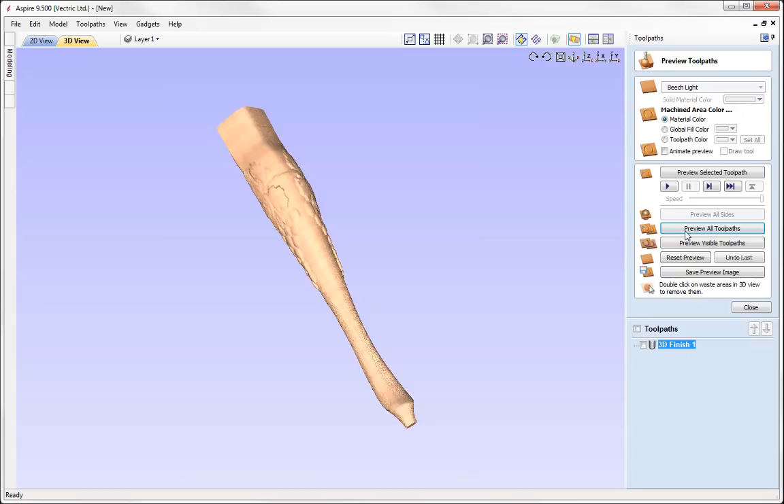Okay, so the toolpath is complete. I can now simulate that. The simulation is complete and we can see the result that we would get using that particular tool.

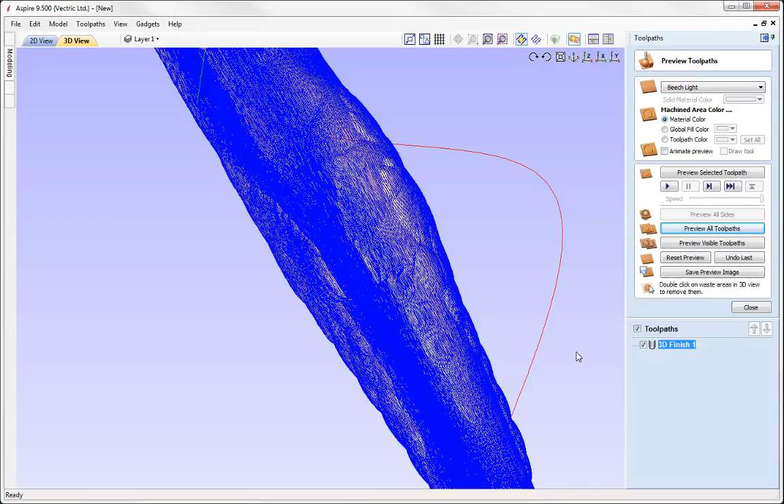And of course I can view the wrap simulation and also the wrapped toolpath. So there you can see some significant improvements to the way we import models in version 9.5 and the way we can visualize and work with a wrap model through to actually creating toolpaths.

With version 9.5 there's a significant improvement to the way we handle spiral ramp moves between toolpath profiles. In version 9, helical ramps were output as a series of straight line moves. Essentially the spiral ramp would be broken into a lot of straight line segments, which could create a very large G-code file. Whereas for 9.5 those ramps are honoured as arcs, so the output is a far smaller file, but it does require an updated post-processor.

Now the best way to demonstrate these differences is to output a very simple toolpath using the existing post-processor and a new one that's been adapted for outputting arcs. So I'm going to start version 9.5 and create a new file 5x5 and simply add a simple circle which will be centered on the job and go straight through to machining.

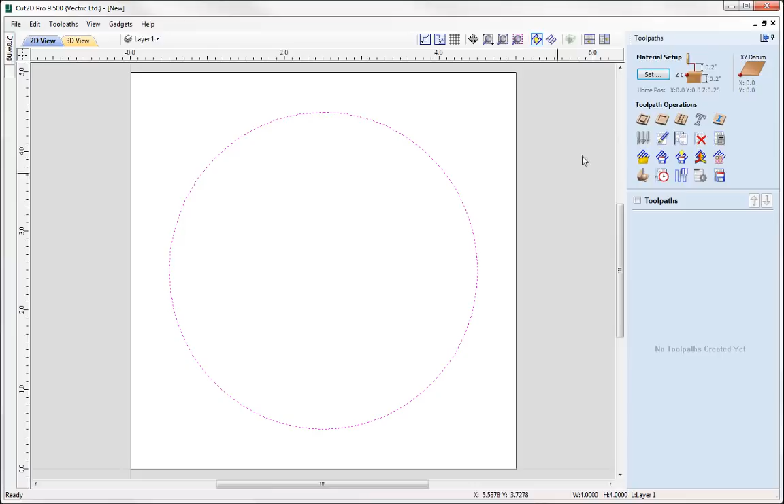So the material setup, very simple, just thickness 0.2, and we've got our clearance heights correct. Moving straight through to the profile toolpath, starting at 0, cut depth 0.1 with a 1/4 inch end mill. Importantly, we're going to switch on the ramps to the toolpath, and I'm going to go for the spiral option.

And simply calculate. So if we have a look from the side here, you can see the tool is gradually ramping down to the blue toolpath level, so you can see that very clear ramped move down to the toolpath profile.

Now if we just simulate that very quickly so you can see that being cut.

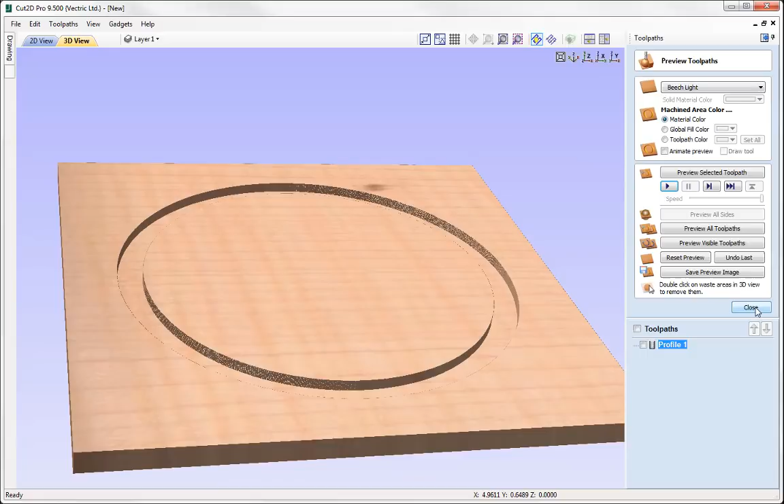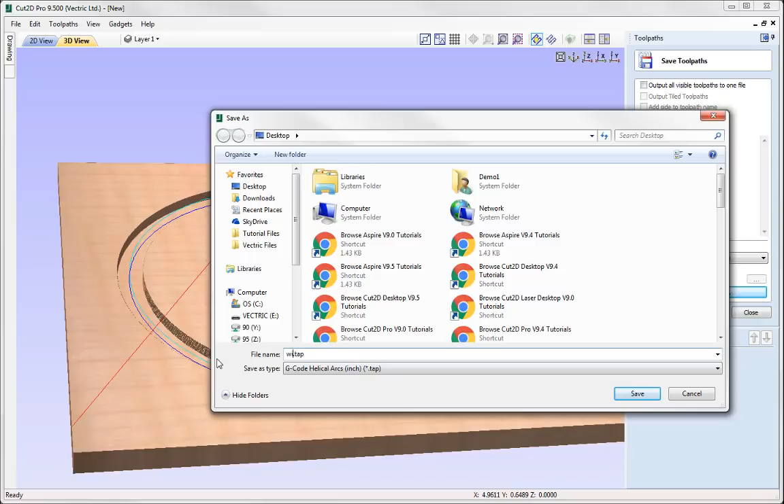Then we're going to take the same toolpath, so I'm just going to change the post processor now to use the helical arcs, and we'll save that and call it with arcs, and we'll take a look at the difference between those two toolpaths.

So they've now been saved. I'm going to come across and look at the no arcs file, and we'll simply open that up into Notepad, and we can see we have an awful lot of entries for what is essentially a simple ramp down to a toolpath profile. So I'm going to close the no arcs one and we'll look at the with arcs file, and as you can see, it's a far smaller file, correctly output with the arcs to produce a far smaller G-code file.

Within machining, there's been some significant improvements in the way we manage rotary jobs. New for version 9.5 is support for G93, which means the rotation speed will vary to maintain a constant feed rate, giving a much better finish quality than without G93 support. Similarly, when outputting the file using a rotary post, you were originally prompted in version 9 to enter the diameter of the cylinder and whether the zero position was the surface or the center. That's changed for version 9.5 - those parameters are now extracted from the job and written into the header of the G-code file. Let's take a look.

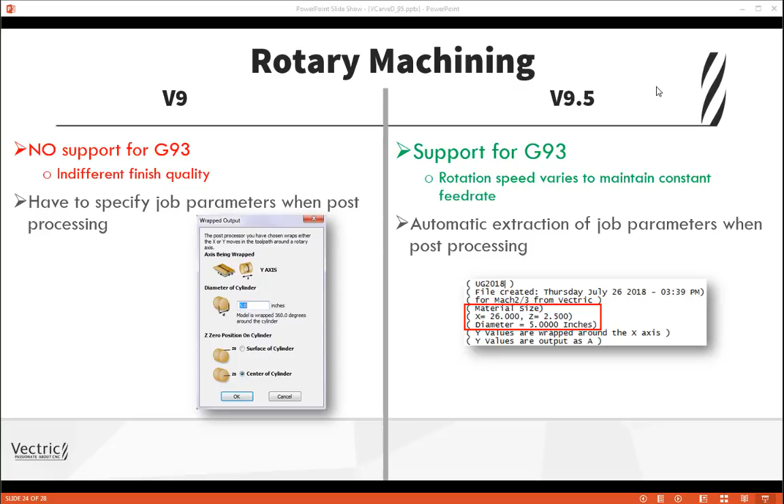I've got a session of VCarve Desktop started here, and I'm going to open an existing model, one we saw earlier. I'm going to switch across to the simulation - there you can see the Vectric text that's going to be engraved, and if we just quickly simulate that, you can see that. Now I'm going to output that using a rotary post.

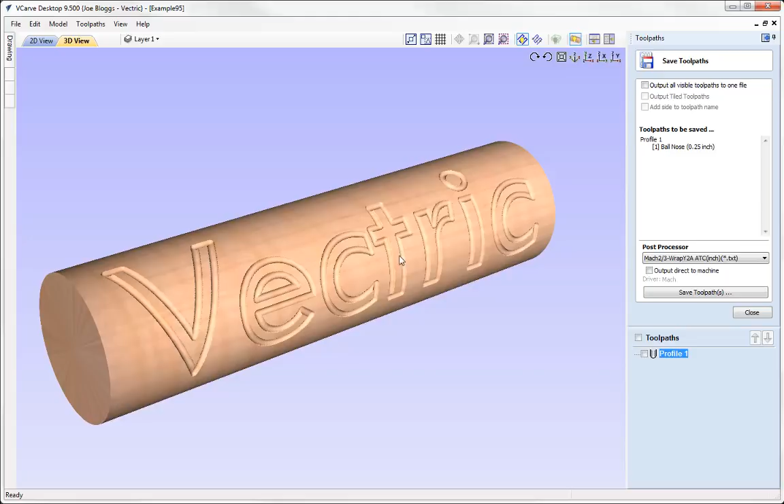So I'm going to save that toolpath, and here we're going to be using a wrapped post, which is wrapping the Y-axis to the A, exactly what we want since this is aligned to the X-axis. So we're wrapping the Y values. I'm going to save that toolpath now and simply call it Y to A, and we'll save that onto the desktop.

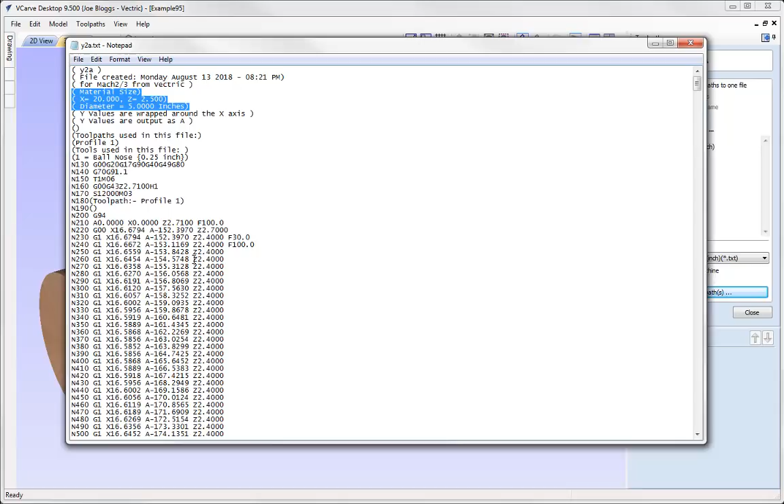I'm just going to pop open that text file now, and we can see at the top is specified the length, the radius, and of course the diameter. So you can see those values have all been entered into the top of the header for the G-code file automatically, rather than the manual entry of V9. So for VCarve Desktop users, it's a much more simple process compared to what people have been used to with VCarve Pro and Aspire in the past.

Okay, so let's summarize all the new features that have been added to Aspire version 9.5. We initially looked at changes to the infrastructure in the form of automatic download and entry of your license details to get your software working, and how that also extended to the way we can download clip art. We've dramatically explored the changes to Rotary and the fact that a new job type has been added, with a huge raft of improvements surrounding that.

The improved text editing and creation tools that have been implemented, the new vector unwrapper, the picture editor and cropping of bitmaps to a vector, and within modeling, the far easier way in which we can import either flat or 3D models and export them as a fully wrapped 3D model. Within machining, we've added some necessary improvements for Rotary, and very importantly, we've added helical arc support, which creates a far smaller G-code file. So as you can see, version 9.5 represents some excellent improvements over version 9.